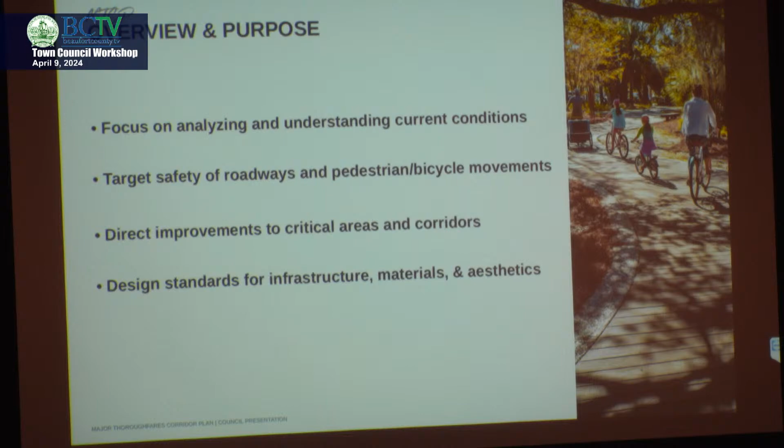I want to jump in real quick, because as I work with Brian and Sean and talk with the community, one takeaway that's probably a little more invisible to town council and the community is establishing a position with our South Carolina Department of Transportation. Our US Highway 278, Pope Avenue, all those streets, well, we know they're not ours. We have opinions on speed, crosswalks, signals, landscaping, treatment. Every time we look at a new segment, example, the landscape cleanup around Sea Pines Circle or the crosswalk at Palmetto Bay Road and Arrow at that intersection, all of that is through an encroachment permit to the Department of Transportation, and most times they ask us, what's the town's position? So what we're trying to do is not bring them one piece at a time, but for the entire system, the entire network, have a grand plan, a grand scheme, so we can implement it over time.

And I think that is the big purpose of the larger document from my vantage point as well.

If I can add, one other critical piece is having a plan in place so we can seek funding from other agencies and partners. Without the plan, it's difficult to convey what we're trying to accomplish. Having this in place with some consistency, the expectations are there. When we request grant funding, there's confidence to know what we're asking for and what we'll be getting with that money.

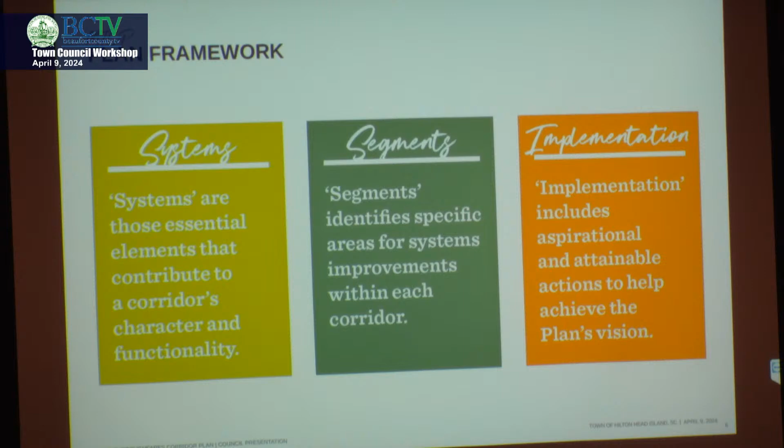I've got my two very capable colleagues with me as well to touch upon some of the technical aspects. The systems, again, we spoke to you before about those. It's about creating safe and robust trail and pathway systems. We've been known through the years as having a world-class trail system in this town. There's still some missing pieces to that, interconnectedness and consistency and width. Again, we've got to prioritize the safety of pedestrians and cyclists. Automobile operators have the luxury of having a vehicle about them, but those other groups do not.

Speed, looking at the speed issues and how that affects the geometry of intersections and turning motions. We've got some high-speed areas in this town, as you know. And bringing a sense of Hilton Head specific character to these corridors. That isn't a monoculture that every street needs to look identical, but this is a very unique place and it needs to have a unique signature from the signage and landscape standpoint.

And I'm always amazed at how much traction, no pun intended, that we've gotten out of our transit system on this island in this town.

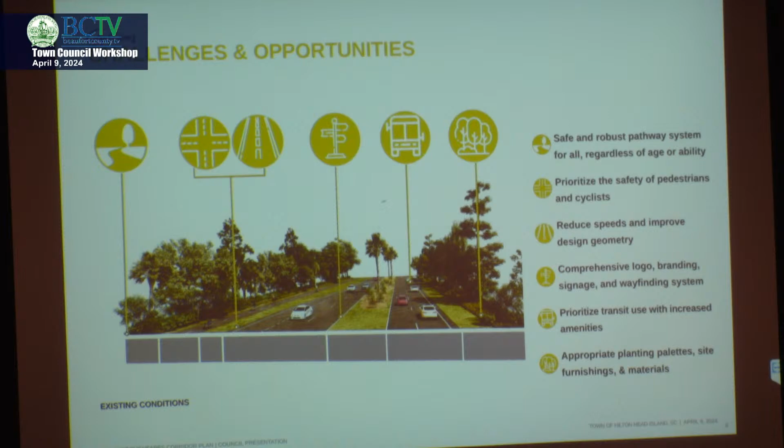So on the landscape and aesthetic side of things, standardizing these materials, dealing with our medians, more robust plantings to provide that separation, providing island-appropriate lighting at key places, intersections and crosswalks for pure public safety purposes, and increasing that separation between automobile and pedestrian bicyclists to the extent possible.

And think about the maintenance and sustainability of this—certainly the engineering aspects of sustaining sight lines, but also the maintenance and operations of these systems. Let's not create more work for ourselves. Let's deal with Mother Nature.

Signage and wayfinding—we've got great public art displays in this town. I think we've got more opportunities to do that over time, and I think that speaks to the brand of the town, and also consistency in improvements and additions of signage and wayfinding on the trails.

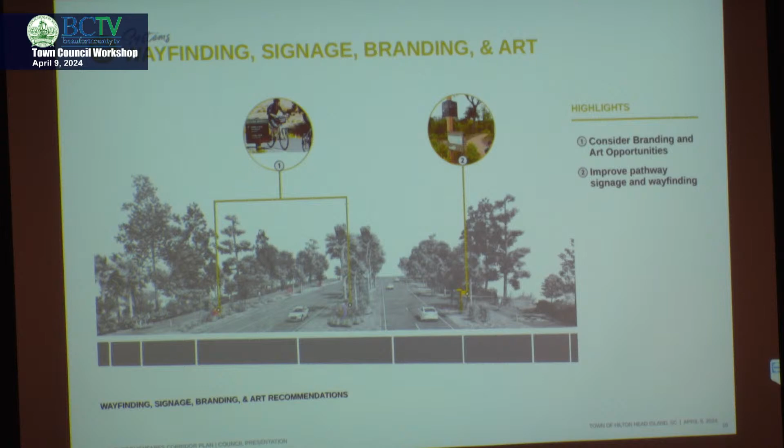Roadways, my friend. Absolutely. So as we've been talking, some of the things that are important for us to think about is creating a uniform design language, especially for our roads.

Your visitors, as well as local residents—you've got a unique driver population here. You've got folks who've been here for many, many years and folks who are just coming for the first time. Consistency in design language is going to be important as we look to enhance safety for the overall corridors.

Your biggest public spaces that you have are your public roadways. And so creating a safe environment is going to be important for us.

And so the first key thing, as mentioned earlier, is that you don't own all of these roads. You have to do things through an encroachment process. SCDOT is important for that.

So far, they've been very receptive to what we're going to present today. But setting important information such as your landscaping, your speeds, your widths—all of those things are going to be important. And then again, incorporating signage and pavement markings as well.

Access management is one of the easiest ways to improve the safety and overall functionality of a corridor. Not every parcel needs five driveways.

We got into a place years and years ago where we just would open up any piece of property for a driveway. We found that interconnectivity and focusing those access points in key locations are making our roads much safer, and how we control those access points as well.

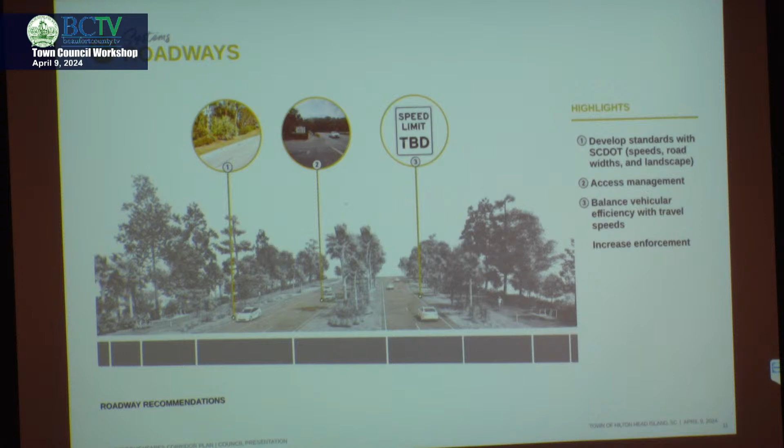A couple other things that are important as we talk about that standardized language is our intersection geometry. Just the segment we're going to talk about today has got some very interesting geometry out there.

It's important for us to make sure that drivers understand what they need to do. And so when we have variations in that, that's when we create risk. We also create concern, and we create accidents because of that.

Improving queuing areas, both along the pathways as well as intersections, is important. I can't stress this enough.

We'll talk about this a little bit more, but improving our crossing standards—how we cross the street, where we intermingle with vehicular and pedestrian and bicycle traffic. You've got a wonderful trail system, but you do have to cross over roadways. So making sure those roadway users understand what's occurring there from both perspectives is going to be important.

And then prioritization of our bicycle and pedestrian safety at intersections. Number one key point right there.

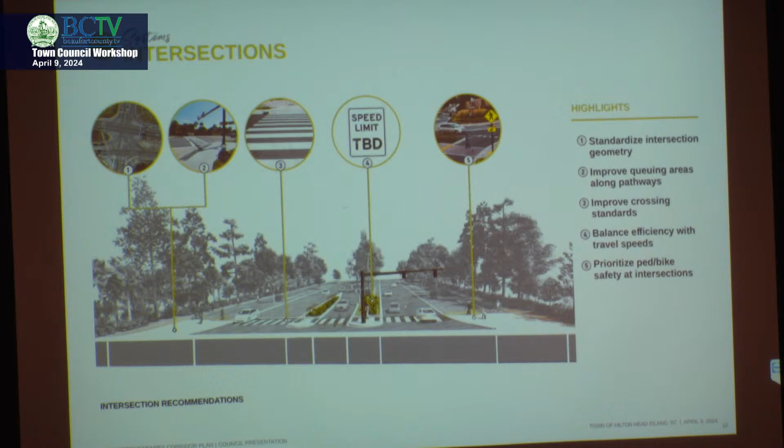I think one key theme throughout this presentation is legibility and consistency, to help set expectations for the vehicle driver, bus operator, bicyclist, and pedestrian. As a mom of two young kids, I understand how we want to move through our systems, and our roads are really set up for moving cars. But with our pathways we want to think not just about safety, which Jonathan spoke about as a statistical number, but about the comfort you feel moving through the system, making sure you feel comfortable with your kids or whoever you're with.

Some things we want to think about are filling those gaps, making sure small gaps are closed, because that has a big impact on overall mobility. Also increasing the amenities, which goes to legibility and consistency, setting expectations on where you'll find certain things, the materiality of those systems, the wayfinding, and the consistency of design for our pathways. That goes a long way for transit too. I like to think of transit as part of the public realm.

Pathways. Bicycle and pedestrians. I think it's just continuing what you're doing and making sure they are the priorities. I think you're doing a great job. All that we need to pay attention to, in general.

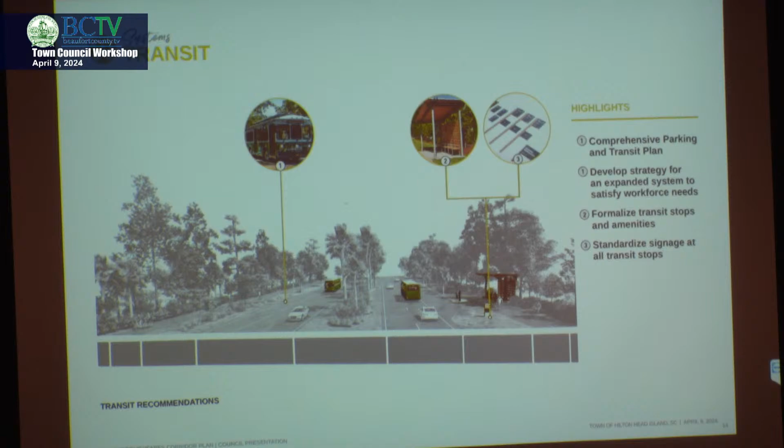Back to transit, it's again about the public realm, making sure it's legible and integrated into it. We need to think about our community and who the users of the public realm are — it's not just cars, but about 30 to 40% of our community are people who can't drive or who rely on bicycles, walking, and transit, and about how transit can be integrated into our system. I haven't looked at it recently, but that's in general.

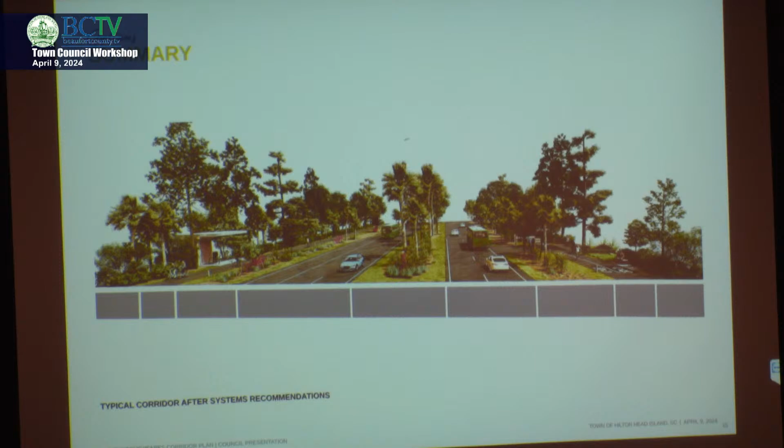With all those incremental systems, this graphic shows a typical corridor understanding of what we're going to talk about next with the segments — and you'll find there's nothing typical about our segments, since every reach of these roadway systems is different. In the graphic you can see all those elements brought together: transit shelters, comfort stations, separation to trails and more robust trails, median planting, transit, appropriate landscaping, and some art opportunities. It's with this summary of elements that we've looked into each segment, as Brian identified early on.

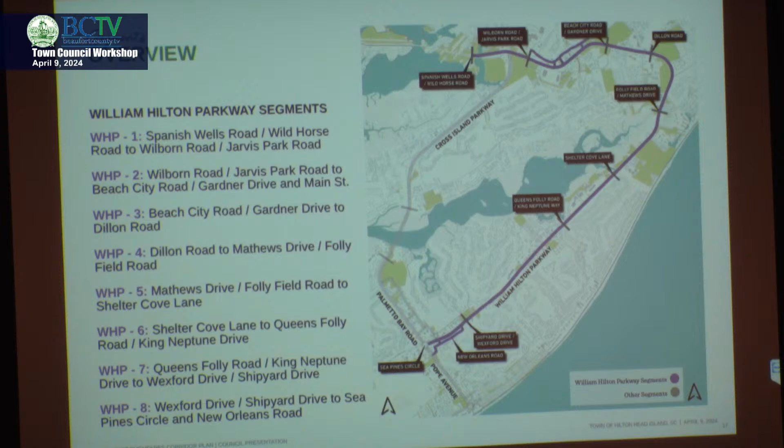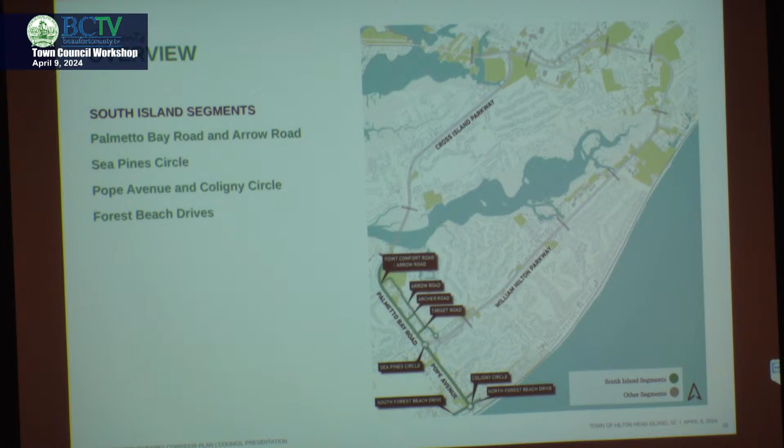The parkway itself is broken down into 8 reaches or segments, based on the character of the place — not necessarily its speed limit, but how it feels and the land uses adjacent to it. Some are bigger than others in length. The South Island segments, as we spoke of before, are Palmetto Bay, Sea Pines Circle, Pope Avenue, Arrow Road, and the connective tissue between Arrow and Palmetto Bay. Also North and South Forest Beach segments, where we specifically address pedestrian crossings to beach access. And the Cross Island, which we've broken into two segments: the bridge itself, where there's a fair amount of folks on bicycles and on foot doing a morning constitutional up and down, and the segment of the parkway on terra firma.

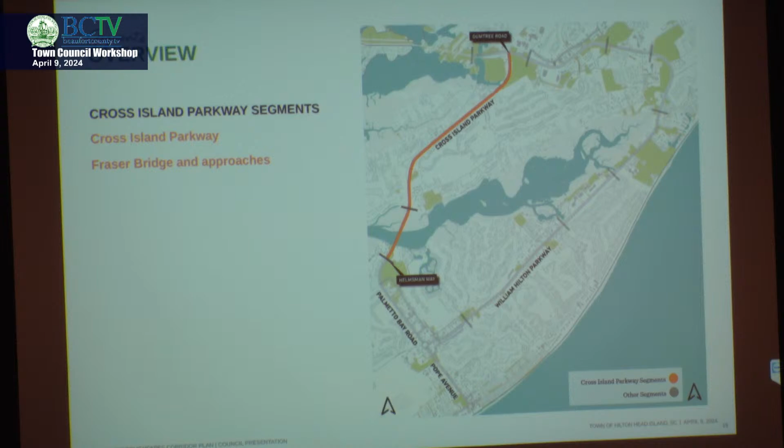So, continue to lead with safety — we've got to look at these high crash areas and minimize them through good design and good enforcement. Connectivity: there are still missing teeth in our systems, and not every neighborhood currently has pedestrian and bicycle connection to destinations and to others. As Addie suggested, we need to fill in those gaps and create something unique to Hilton Head Island. There are certain signature streets and corridors, two of which we'll talk about next, and others as well, but we want to make sure we approach these aesthetically and reinforce the character of the place.

So one of those segments is William Hilton Parkway. Again, this was a priority as directed by you all, just based on the crash data and some of the unfortunate incidents that have happened there.

This is preliminary engineering. What we've dealt with heretofore in terms of systems and segments is at a study level. Preliminary engineering is taking it to the next level of magnification, getting down to finer grained detail, not tens of feet, but feet and inches. It is the link between final engineering design, construction documentation, and getting things built in the ground. This is a necessary step to link the vision to physical construction.

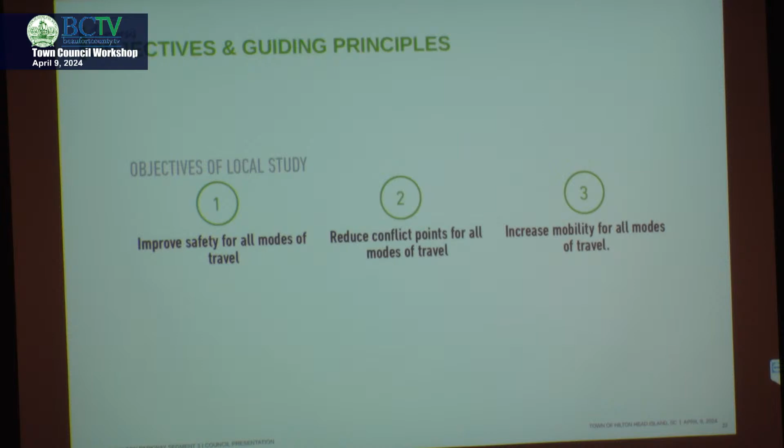This segment is largely a portion of the Mid-Island District, and through the district plan that was adopted by council a year and a half ago, two years ago, we brought those principles forward. This segment of the parkway is meant to be a signature street. It is the center of the island. It's got three significant high development areas and Mid-Island tract, soon to be a park. It's our busiest segment of town, one could argue, from a vehicle operation standpoint. It also has the highest incident of traffic accidents.

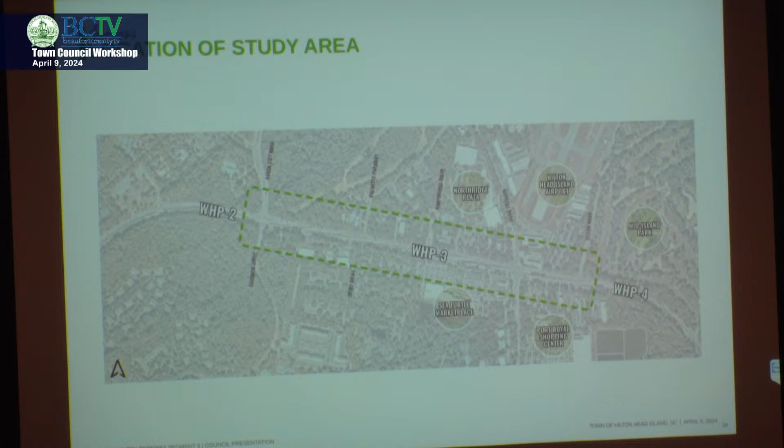So it is a segment that does not go around the horn that is in segment 4. That is the piece from Dillon, moving to the left, which is to the west. A lot of intersections. We've got willy-nilly pedestrian crossings. We've got some marked crosswalks, but all of that needs to be addressed through these intersection plans.

Is this an area that involves a lot of collisions and injuries? Yes, we've had some. Not the most, though, is it? I think it is. Hard to know.

And a lot of rear end collisions, people making turns. I've experienced someone crossing the parkway outside of a crosswalk. There is no crosswalk there. And had I not been paying attention, there might have been another accident.

So it is critical. Some of the history of the corridor, just so everybody understands, today is a lot different than 1965, right? So we shouldn't beat ourselves up. These are issues that every municipality faces, and you all are keen on addressing them holistically.

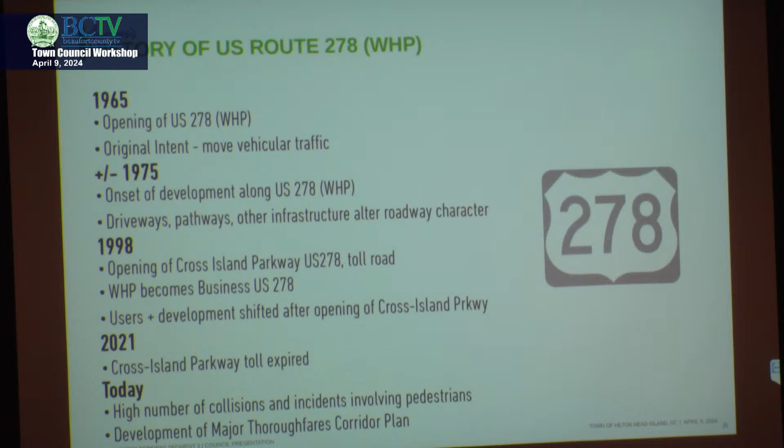To build on what Brian was saying, I think one of the important questions we need to ask is what is the role of this street, and also the history of the street. This street, when it was built, was designed to move cars through Hilton Head. Throughput was the key. As the island's developed, we have land uses that have come online, and now it's about throughput and access, and that is causing a lot of our conflict points throughout the corridor. So it's really to understand that history of how we are in this position today.

And to your point, there have been a lot of pedestrian crashes, 15 fatalities and 53 major injury crashes within the last 5 years. So it's a significant issue. Segment 3 definitely highlights that issue of that conflict between throughput and access to our land uses and why we need to get it right.

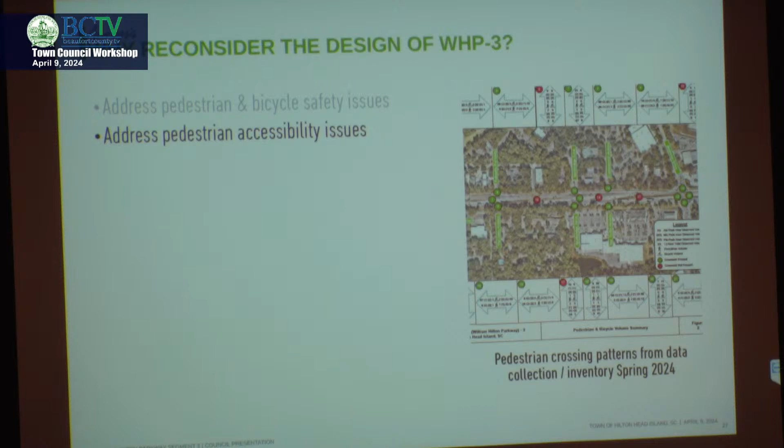Sorry, I didn't want to interrupt you twice, but I noticed that there were traffic counters out there maybe a couple weeks ago. So do we have data from the traffic count through there as a result of that? We do. That information was used to help us understand the speeds through the corridor as well as continued volume, and then classification of vehicle types that are going through there. How many pedestrians, or how many personal vehicles, and then of course heavy units, buses, trucks, all of that information.

So you could do all that from those couple of cords that ran across in two places? I understood speed, so I guess the speed limit is 45. Did you find an average speed through there? We base it off of 85th percentile speeds, which is the point at which 85% of the population is traveling through there. That's kind of a measure that the FHWA has prescribed to us to follow.

What we found was that there were speeds in excess of 65 miles per hour through there. But the consistent speed through there was closer to the 50 mile per hour range. And so what that tells us, though, is that you've got a posting of a speed limit, but you've got a road where most people feel comfortable driving much faster, a lot faster, and that's a problem.

And so we got to find a way to change the design language that makes that speed appropriate through there for all users, not just motor vehicles. So the comfort level for vehicles is lower.

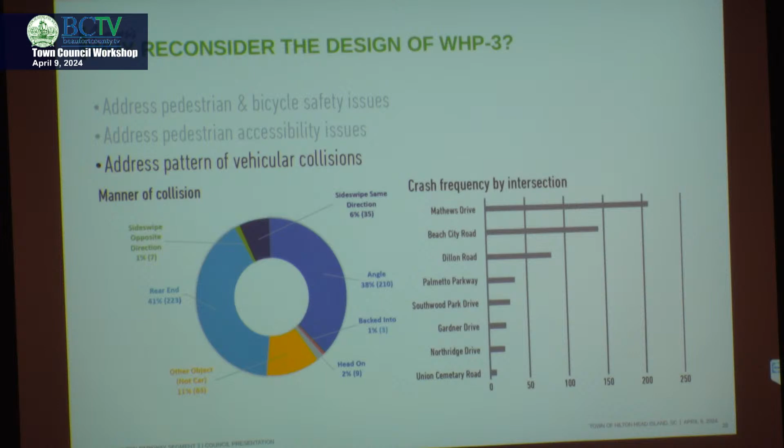Again, providing the safety and the comfort for all modes, I think is going to be really important. Having watched and walked that corridor and watching all the movement of all the modes out there, so increasing mobility, but the safety and comfort and access for all users.

And as I spoke a little bit about that access of William Hilton Parkway really transitioning from a throughput, a street that just moves people, really about access to the land use. How do we begin to balance the land uses and the transportation so that it works in concert and we're not having a lot of these crashes happening along the corridor?

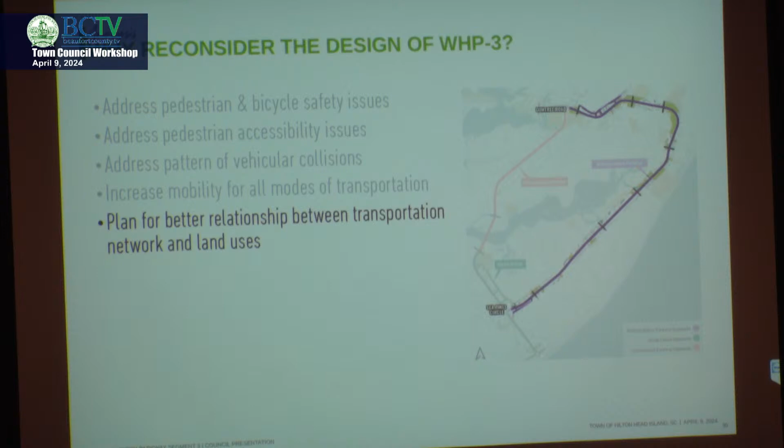So staff and our consultants understand the importance of this section and addressing it as quickly as possible. We did a permit application to SCDOT to improve things on a short-term basis in November. We got feedback from SCDOT about additional information that they needed to approve those requests in December. We talked to Jonathan Guy and Kimley-Horn about creating that information that was needed.

Yesterday, they delivered this packet of paper to us that we can submit to SCDOT. And Jonathan talked about some of that and answered some of the questions earlier in the meeting. We will be setting up a meeting with Josh Johnson from SCDOT to talk about these recommendations that Kimley-Horn came up with to justify our request in November. That meeting will hopefully take place next week.

Those requests included some pathway lighting, puck lighting in the pavement for the non-signalized intersections, RRFB - rapid flashing beacons - and push buttons so that when there's a pedestrian that wants to cross these mid-block crossings, they can push the button. The rapid flashing beacons go on, and the pavement puck lighting comes up so that people understand that there's somebody needing to cross there.

We're going to improve the pedestrian crossing markings out there. We talked about a reduction in speed limit - the reduction recommendation is 35 miles an hour. And then do some kiosk improvements in that area.

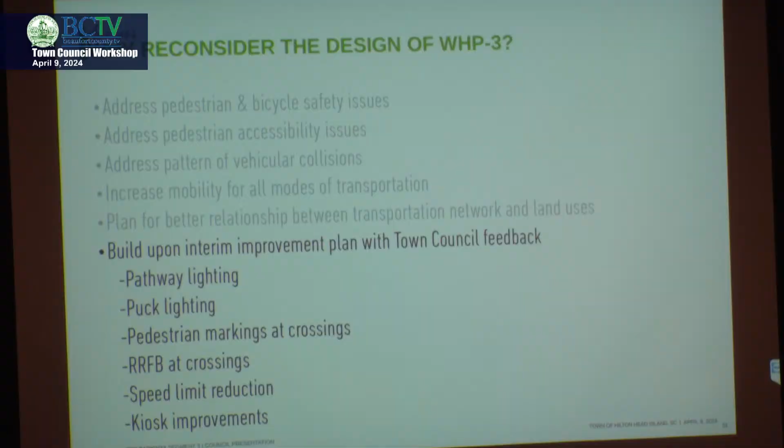In connection with those suggestions and recommendations, one concern is that pedestrians and cyclists were not crossing at crosswalks. They were doing it in the middle of the block. It sounds like these will be safety inducements, that if riders and pedestrians know about them, they'll go to the intersections.

But there may also continue to be people who don't go to intersections. One thing I forgot to mention is that we plan some median plantings, low-level plantings to encourage people not to have to go through the jungle to get to the other side. If those safety improvements are in place, more people will use them, helping them decide: do I really want to go through all that, or just walk an extra couple hundred feet?

No, go ahead. Jimmy, one of your points here is speed limit reduction. You can take signs that say 45 miles an hour and move them down to 40 or 35, but I don't believe that's going to slow people down. What are the techniques or tools in this design that will encourage a lower speed?

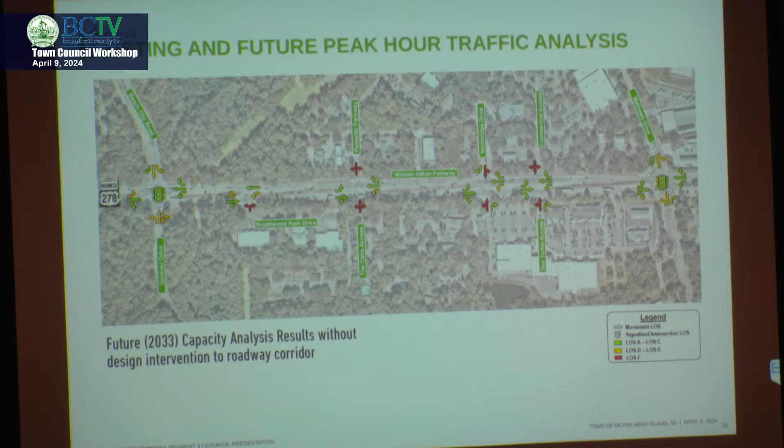Let's talk about some of the tools and mechanisms we've got for the future year. As Mr. Orlando said, we've already had some initial conversations on all that you're going to see here today, especially on William Hilton Parkway, and have received the nod that this works within our right-of-way from SCDOT. That doesn't give you the right to go build this today, but what it tells us is we've got a really good plan to move this forward.

Our first goal is to change that design language of speed. For so many years, this corridor has just been a thoroughfare just to get around to the beaches. We need to change that. The population has changed, there's more people here. How people move in this area is important, not only just from a motor vehicle standpoint.

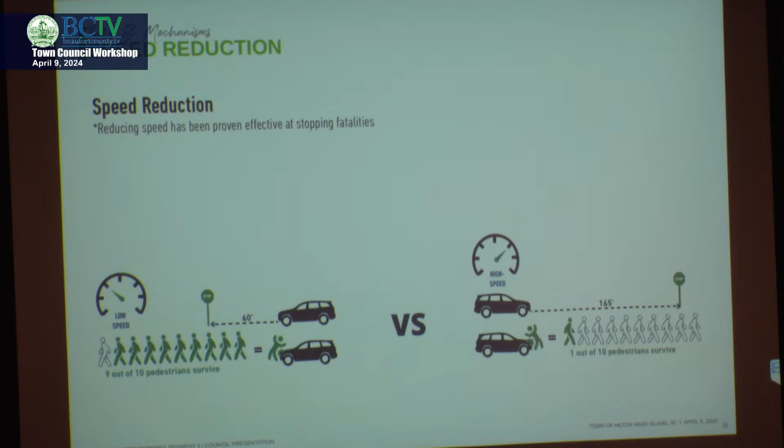You can see that what happens when we increase that speed, that overall stopping sight distance we need increases by a tremendous amount. Just that change right there is over 100 feet. And you also see the survivability when that does happen, so we're stressing the point of that as we get into this.

Another way to do this, as I mentioned earlier, is changing how we look at the geometry. The first one is our lane widths. I had 12 foot out here for a very long time, and when you have that plus a median plus open shoulders, it feels like you got 14, 15 feet. It feels like I've got a runway and I can go really fast.

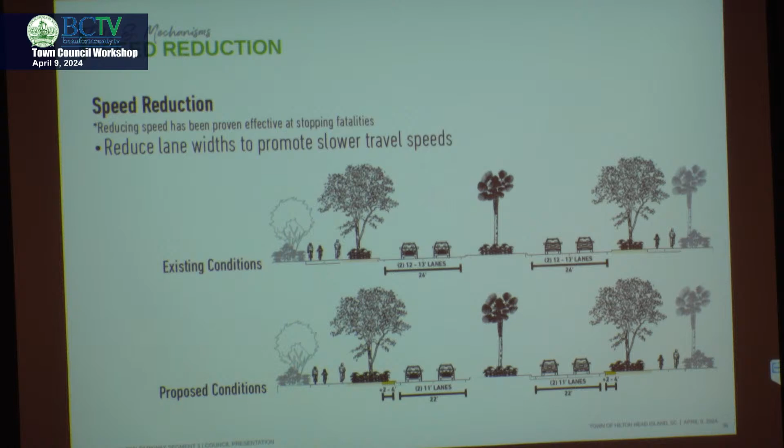Because this is still a U.S. numbered route, SCDOT will not let us go below 11 feet. That is their policy, so we need to work with them to get that down. There are other things we will do that will change that language though, but 11 feet is our recommendation.

I've mentioned the speed reduction through here and what we would like to do at 35 miles per hour. This does not mean we're going to do a uniform posted speed throughout all of William Hilton Parkway though. We're going to look at it contextually. And here we need to change that speed limit from 45 miles per hour down.

Reduce the signal cycle duration. Sometimes we do need to look at how we do that. Your adaptive signal system is already working through that right now, it's providing that change of signal systems. We want to incorporate crossing patterns that work, so adjusting those signal timings to help bring more crossings for bicycles and pedestrians is going to be important.

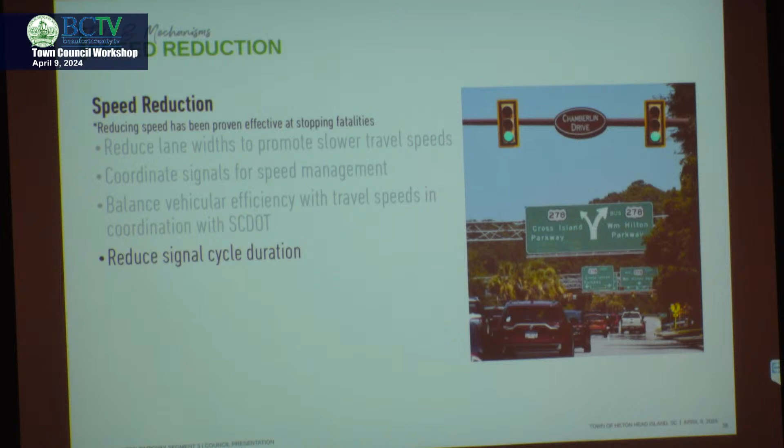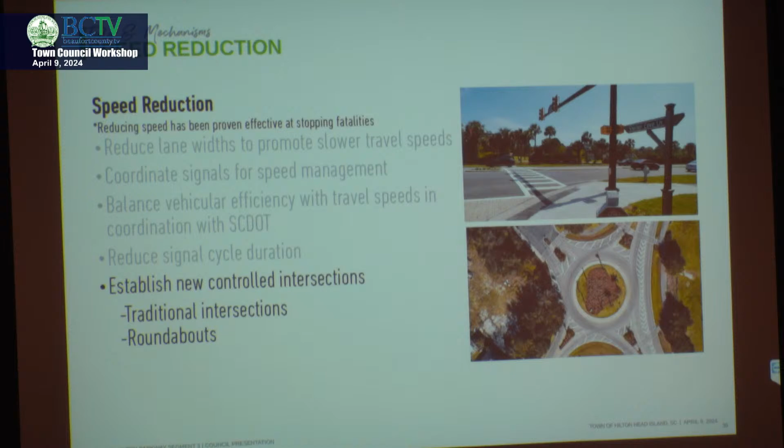We also have to look at different types of controlled intersections. This is essentially how are we going to assign the right-of-way? If we keep it on William Hilton Parkway and never let the side streets go, we're going to have more congestion, people get frustrated, and they're going to begin to cut through neighborhoods and other things. So looking at traditional intersections, signalization, and some four-way stops and potentially some roundabouts too, when and where we need to do that.

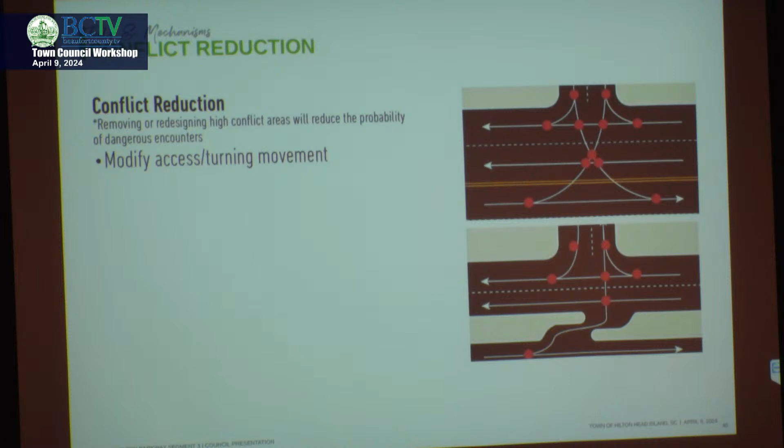The number one thing we need to look at, it goes back to all of these other things, is conflicts, where we have those intersection points between vehicles. Up here, just when you have a full movement versus a controlled movement, you reduce the number of conflict points, those interactions between vehicles, just by changing how a median interacts. So that's what we want to look at: focus the turning movements where they need to be, not necessarily restricting them, but focusing them where they need to be. That's going to make a big difference on how we move people here.

Then, of course, providing protected pedestrian crossings. RRFBs, rectangular rapid flashing beacons, are one of the first things that we do. Moving from there, we can go into a hawk signal, which you've got some on South Forest, which controls traffic there, but also looking at signalized intersections. DOT will tell you, and I've seen this in the number of studies that I've done and the intersections I've designed this way, better compliance comes with signalized intersections than hawk signal.

Drivers do not understand what a HAWK signal is. They don't know: do I stop? Do I go? What do I do? Do I have to pay attention to this?

So SCDOT will allow these, but they prefer to do a regular traffic signal. We'll work with them on where that fits into the overall program.

Sorry, a quick question there. For lack of a better term, I call it an all-stop. That is, instead of allowing pedestrian and bicyclist crossing with turning traffic, there's no turning traffic as well. Is that included in these designs?

Absolutely. Some of the things we can intertwine into the signal system are what we call LPIs, leading pedestrian intervals, which is essentially an all-stop. That pauses the network just a little bit so we get pedestrians out ahead of those turning vehicles and the side street or main street movements. It's easy to incorporate into the system without a lot of infrastructure upgrades.

Hopefully a longer interval for those of us who move more slowly, or where there are so many lanes that you have to run across. Okay, thank you.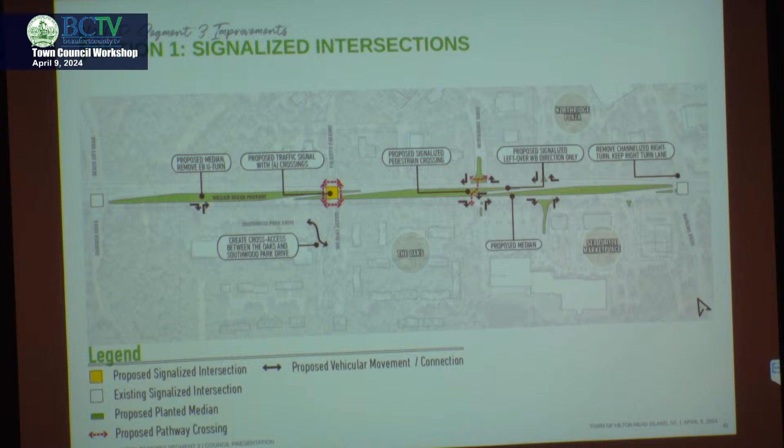Focus on just two intersections. I've already discussed these, but you can see the improvements here in how we would lay this out. You can see the channelized movements providing generous crossing locations and generous crossing widths for the crosswalks, uniform stamping of those crosswalks, which has already begun coordination with SCDOT, and that directional signalized crossing down at Sea Turtle Marketplace with that left coming in. All of these things begin to enhance the safety.

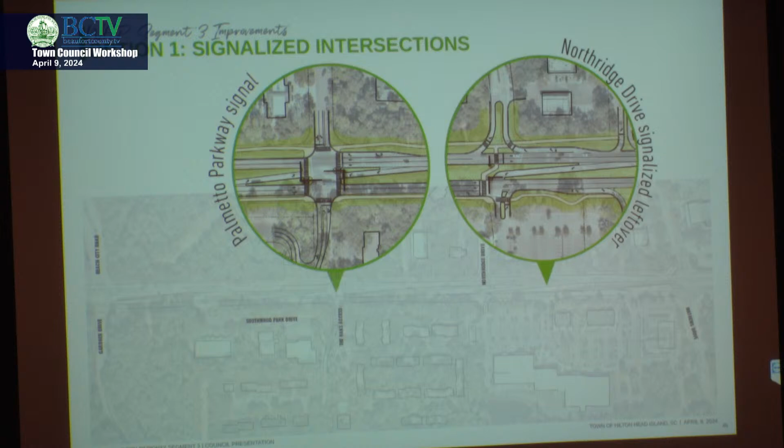Tom, are you adding pavement or taking the pavement out to these? Great question, we're actually taking pavement out. One point I failed to mention is that because of the way you're setting these medians up, you're actually enhancing your stormwater by removing impervious surface. So there's a double-edged benefit from this - not only pedestrian and bicycle and mobility safety, but also an environmental impact in a positive direction.

Second question, how many cars travel through this area on a daily basis? You're in the upward of 30,000 vehicles per day. I can get you a precise number, but that's roughly what it is.

Another option here we mentioned - I failed to mention this at the beginning, you'll see these options laid out, option 1 and option 2. Option 1 is the one we feel strongly about, and option 2 are some of the things we've considered. I mentioned earlier that we did consider some roundabouts through these locations. To be honest, the reason that was considered is for one of our primary reasons - speed reduction. Roundabouts do that, but they also provide incredible mobility and keep traffic moving through there. So we did consider that.

We did present this to SCDOT, they did not have any reservations. We actually looked at a series of roundabouts through here at Palmetto, Northridge, and of course at Sea Turtle, providing that mobility and access as well. Our conclusion was to actually go with something more uniform on the corridor, which is what I just recommended with option one, where we have traffic signals at those locations.

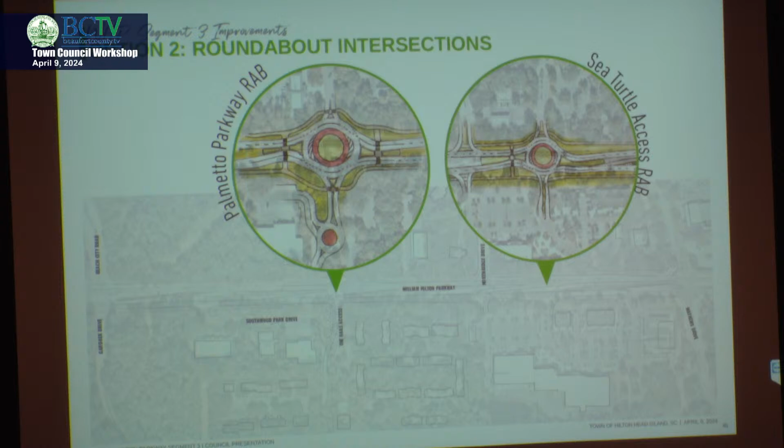So let me jump to the conclusion. With a signalized intersection, it doesn't reduce conflict points to the same level as a roundabout, as already expressed in some commentary today, and it doesn't control speeds as well. But they do have benefits—higher level control for pedestrians, which is a large concern for us, and by channelizing this we take out some unsignalized conflicts. Roundabouts provide a gateway, as mentioned earlier, though there's some fatigue on the island with roundabouts, and close spacing of multiple roundabouts—while that spacing does work, I've modeled it—at times with oversaturated conditions it could back up into some intersections.

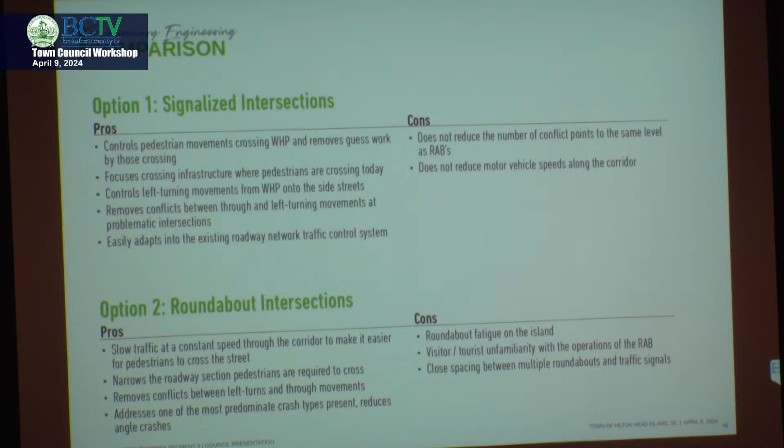Your recommendation is a signalized intersection. Correct, that's where we are at this point, still working through all the final details though. Again, both options do work.

Do the roundabout options require any more right-of-way? A slight bit on the side streets. William Hilton Parkway was designed originally with a very large right-of-way, so you can fit either option in there—it's really just the side streets and how you tie in, so we're talking about really small areas. The main circle fits within your existing right-of-way, which you don't find that often on corridors in South Carolina.

This is great to hear some of your thoughts on roundabouts versus a signalized intersection in a stretch of road where people have been injured and killed, in an area we wouldn't think about a roundabout or signalized intersection. The exercise we have to keep doing is—I don't want to just throw out the roundabouts, but I'm more interested in what's the most efficient and safe enhancement. We haven't dove completely deep into all those details yet, but it sounds like some of you would like us to continue exploring a roundabout option and not go all in toward the signalized intersection. Some feedback is needed, I agree. There may be other places along the corridor that could introduce a traffic circle beneficially, so it becomes a theme—as long as it's not a turbo, I just thought I'd throw that in, Jonathan.

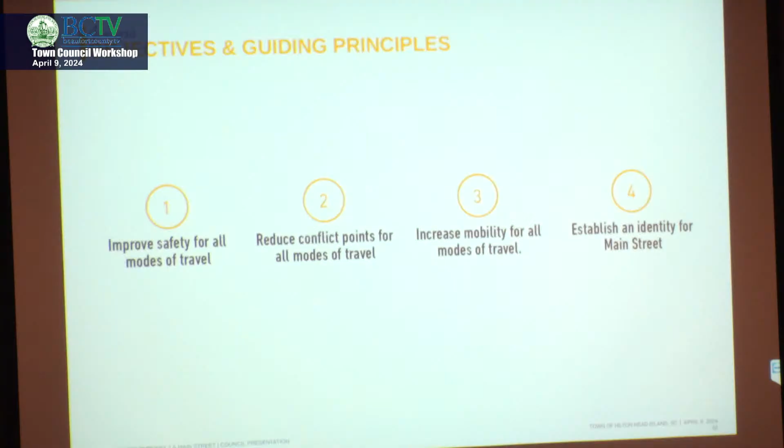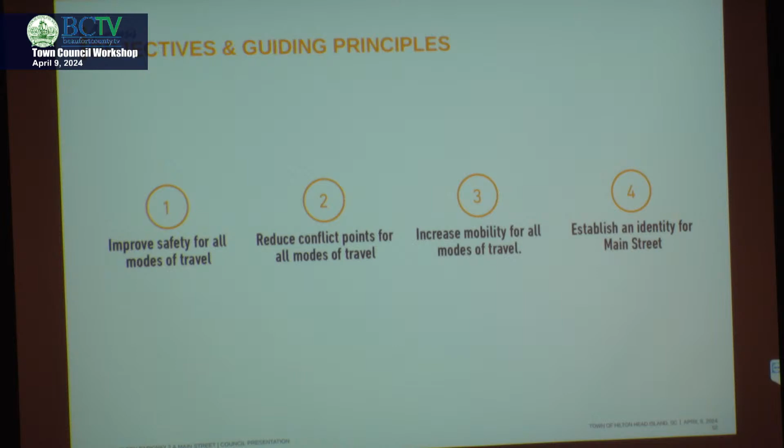Again, not lost on anyone here, it begins with safety—reducing all those conflict points across the various modes of travel. It's safety for everyone, and also continuing to reinforce the identity of Main Street. It's a retail destination, a restaurant and office destination, we think.

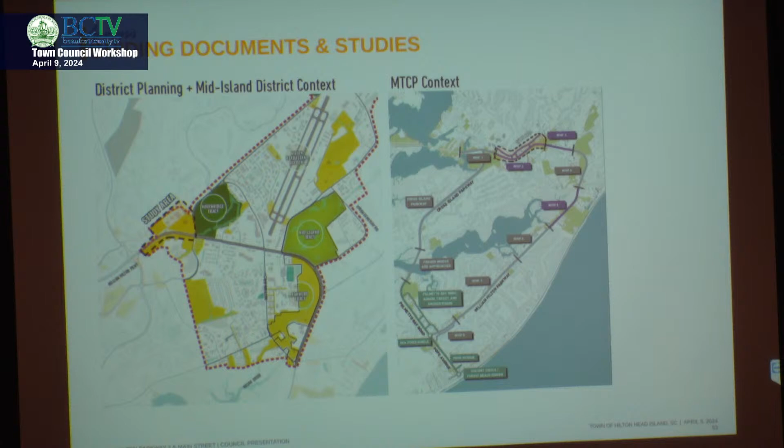So this segment connects on the left image to the segment we just discussed, and it goes all the way west—or north, depending on your orientation on the island—to Wilborn. It's a very key segment, and the town has just recently taken ownership of the other portion of Main Street, and there are needs for it.

So this is the study area, and it isn't just Main Street and Parkway 2, but also the connecting streets between those two. There's a lot of missing teeth from a pedestrian and bicycle standpoint on Main Street, and we want to bring consistency to that and these connecting streets.

Yes, I think bicycle and pedestrian connectivity is going to be key along these streets, particularly with the schools adjacent to it. Also just formalizing where each mode should be within the right of way, and making sure those modes know where turning movements happen along there as well.

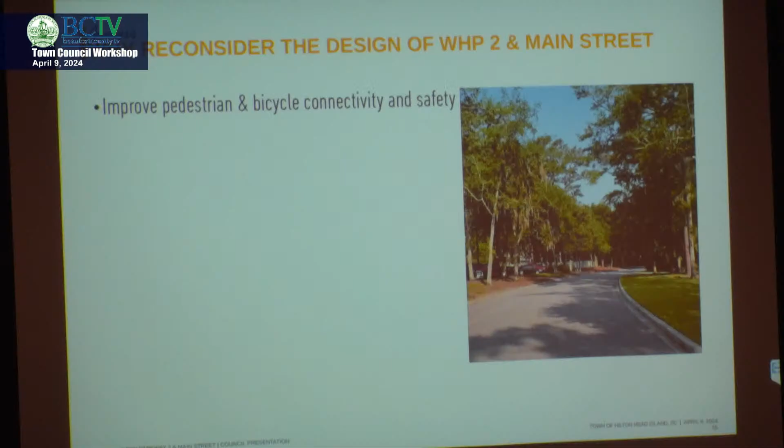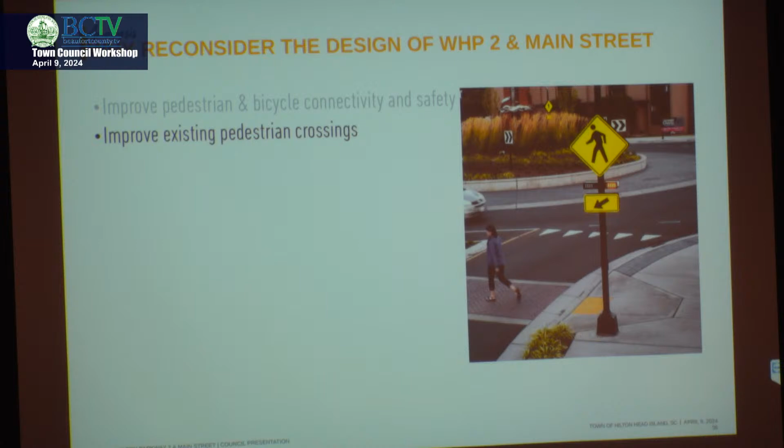As we've talked about, there are different ways we can look at pedestrian crossings—whether it's a raised crossing, an RRFB, a HAWK signal, or a formal signalized intersection. There's a whole host of things we can do on these corridors to really enhance not only safety, as I've spoken about, but also the comfort of all these users.

It's really important along this area, as we have several schools here, thinking about students accessing the schools—not just with bus trips, but also high schoolers accessing jobs. Not every high schooler has a car, so how do they get to jobs within the area? It's really important to think about transit options, access to school, and creating opportunities to move freely and comfortably throughout this space, particularly with all the schools located right here. I think it's going to be critical to move forward.

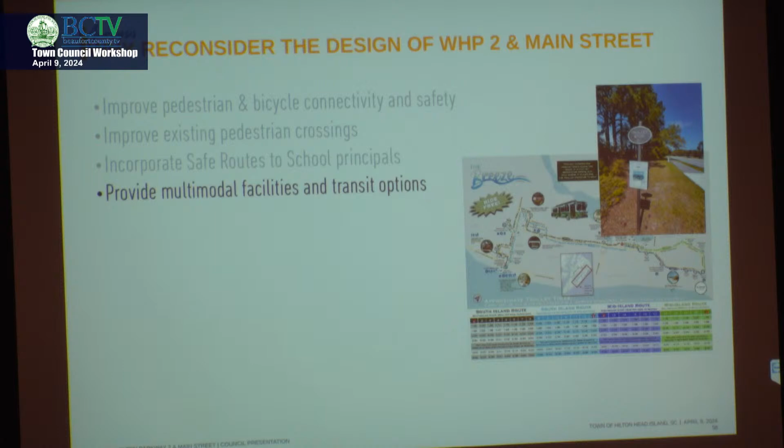In terms of the intersection, we're looking at taking away these right turn lanes and really simplifying that intersection. Again, that helps with the safety aspect of pedestrians and bicycles crossing, and sets expectations for drivers of where they should be, slowing those speeds and making vehicle movement intentional.

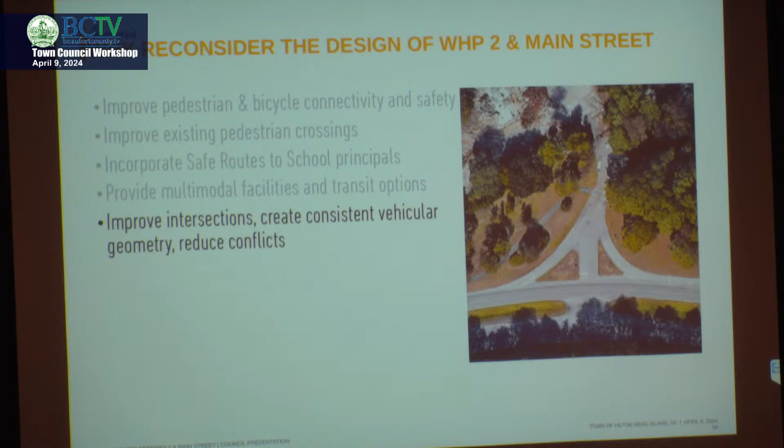Main Street is a great opportunity for us to reinforce what I think is a pretty attractive character now. It's a fairly narrow street with some movement to it, and it's got tree cover for the most part adjacent to it. I think we want to take further advantage of that through the landscape, letting the green environment come into the street to create a more attractive and walkable street environment. As you can see, there are places where we have no walking at all, and we want to brand this as a special place among a few special places on Hilton Head Island.

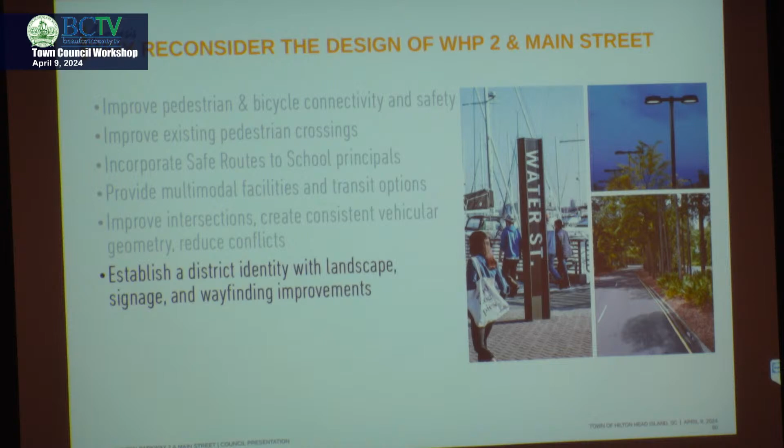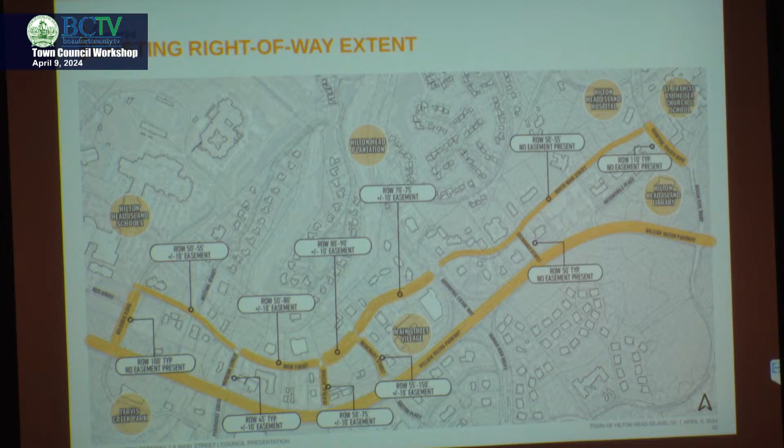That has been the focus of Main Street from Wilborn up to Hospital, and all of these intersections in between. You can see the movement of Main Street as it meanders through. One thing to keep in mind is there's not any consistency to the width of the right-of-way and public domain we have for Main Street and some of these side street connections. We've got the luxury of easements to the west and south of Whooping Crane, which we'll take full advantage of, giving us more room for a section and for pedestrian comfort. It gets more narrow as you go to North Main Street, and side streets vary from time to time, so we've got some segments and sections that differ.

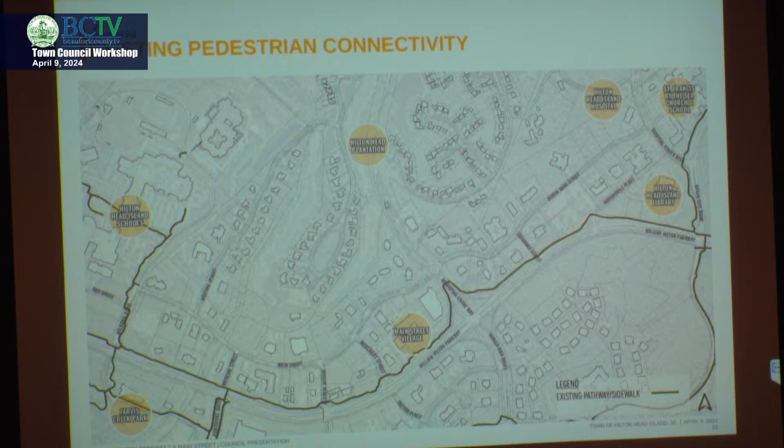As Brian mentioned, we really have a lot of limited sidewalks and pathways throughout the area. We have some pathway on the north side of William Hilton Parkway, but those side streets don't have any bicycle or pedestrian facilities into the adjacent areas. So when we think about the considerations, not only taking into account the right-of-way that is available, but thinking about user comfort along that street, accessing those businesses, crossings were those to happen, thinking of the school-age kid, the high school kid, the parents, and everybody in between, not only accessing the businesses and the workers through there - we're really thinking about how do we apply a design that's both context sensitive to what's happening along there, but also takes into account the right-of-way that we have available, reducing speeds and improving connectivity across Main Street.

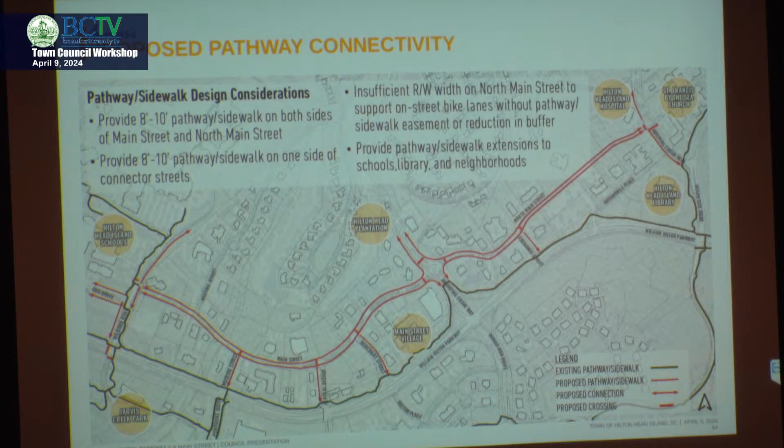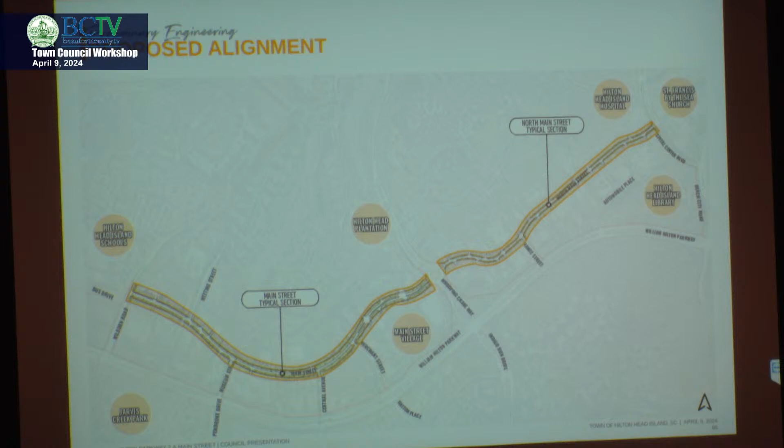Let's dive into some of the preliminary engineering work that has been prepared. As Brian mentioned earlier, we've got inconsistent right-of-way widths and easements throughout both segments here. So we're going to talk about the Main Street section, and we're also going to talk about the North Main section. We're separating those two because there's varying widths and varying desires through there, and we're going to look at a couple different typical sections on this.

We've approached this with areas where we have both an easement present and areas where we don't. In this typical section, what we're proposing are 9-foot travel lanes and then a 7-foot buffered bike lane on both sides - a 2-foot buffer with a 5-foot bike lane, and of course curb and gutter parallel to the tree lawn, and shown on both sides would be a 10-foot pathway providing mobility through there as well. You can see the existing easement through this section of Main Street where we've got 50 feet of right-of-way, which is our minimum, and then the need, where it is and where it's not, of 10 feet on either side to fit what we've got in here.

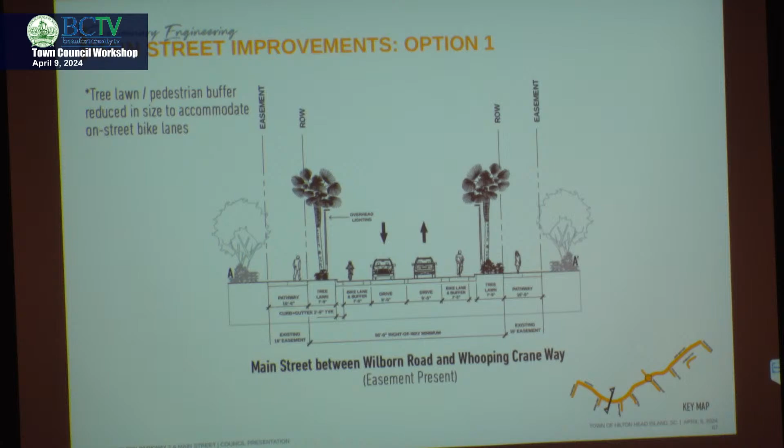So thinking about what that may look like from a perspective standpoint, you can see the bicyclist with the pedestrian buffer. Again, standardized lighting through this, the typical 10-foot pathway on both sides, the travel lanes narrowed down, enhancing our crossings at different locations. Again, standardizing the design language, standardizing your crosswalks and crossing locations so that drivers and pedestrians know what they're encountering.

So option 2 - sorry, can you go back to the nice colorful slide? Some places along this have a landscape median of various width and shape. It looks as though some parts would not have a landscape median and some parts would. From best I can tell, the ones that would are closer to the traffic circle on Whooping Crane. That is correct.

The 9-foot lanes, I guess it was necessary to take out any of that landscape median. I just feel like there's going to be a little pushback from folks who frequent that area to take away the trees. But I recognize that we have to make some trade-offs.

At some point, I guess, we're going to ask the question about stakeholder input from folks that particularly live in there. Four of us here live within the gated community of HHP and come and go from that area a lot, but we should reach out to maybe the POA or residents there, and also the merchants in the Main Street area and businesses on the other side. So at some point, perhaps we could talk about where stakeholder input will come from.

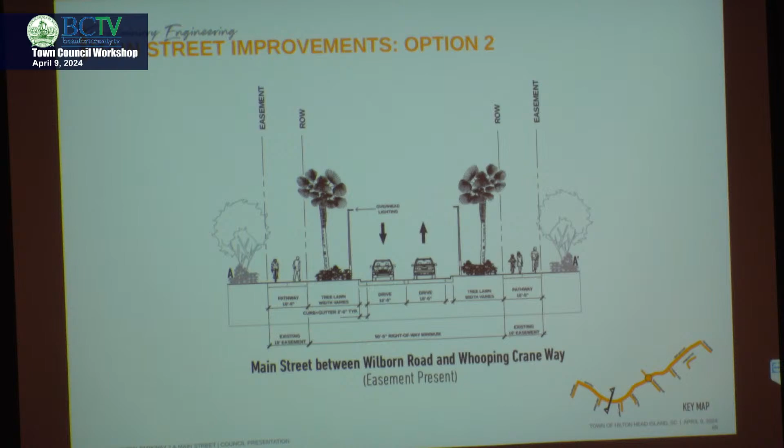This is a representative image of what that may look like. You can see the common typology there that I've described earlier. Overall, kind of where we're at in the overall segment - the main difference is you take out the bike lane on the road and add 1 foot to each drive, and then add width to the tree lawn. It varies in width depending on where we're at, and it gives you a little bit more separation between the trail and the moving lanes of traffic. The street is just for automobiles at this juncture, and bicyclists and pedestrians use the parallel trails.

Right now we've been improving the sidewalk on the side closest to 278, the best way I can describe it, because it varies whether you're going north, south, east, or west. But there's no sidewalk on the other side.

Where the options are prioritized. Correct.

Why would you put this behind the first option we just discussed? What do you like about this one better? We were going to ask you the same thing. Exactly. Well, I like this one, so... you know, both of them work, right?

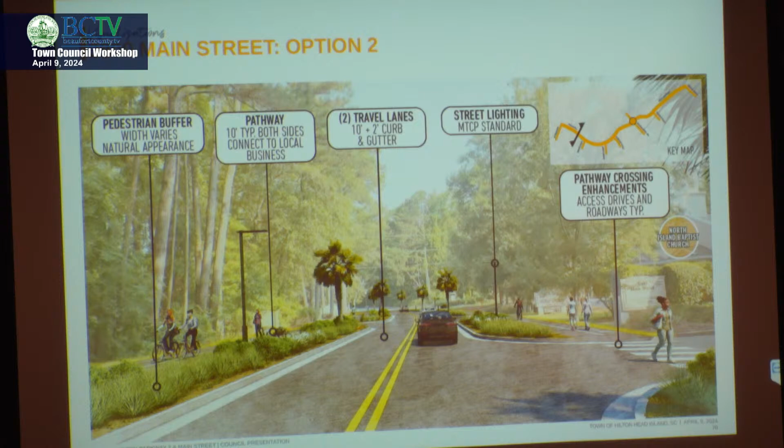With options, there's been some desire for on-street bicycle mobility, separate. And so that kind of was the reason for option one falling into there.

May I add too? Because I asked the same question. I heard all of your comments, and some appreciated pathway off the road like we have on our island versus bike lanes on the road at the last workshop. And I asked the same thing. I asked Sean the other day.

It's not - it's simply a different menu item. But at the end of the day, Main Street, because of the businesses, has a higher potential to be much more walkable than not, right? A lot of our pathways are used by bikes, e-bikes now, and people, and it's less walking and more biking. Main Street, when you're parking and walking to the next shop or to lunch, if you're a traffic engineer and a good one, you're going to tell your municipality as a client to say: separating those folks going fast on a bike from those walking somewhere - separate them. That's what a traffic engineer tells us, and that's the big difference. It's about what our appetite is in terms of how we want that street to function in the future.

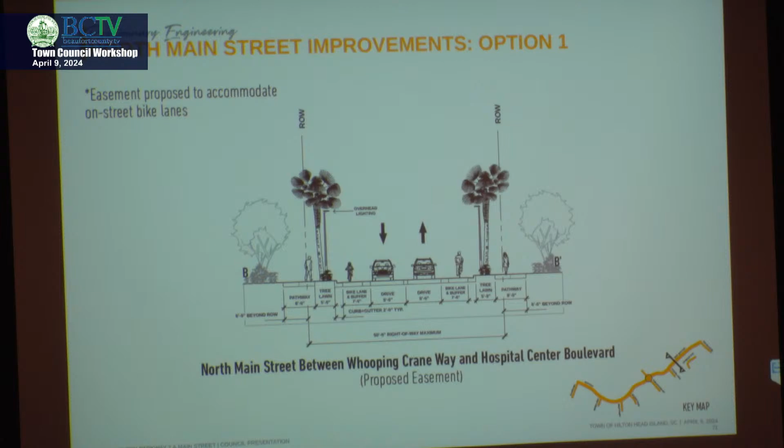That looks like - again, you can see the translation of how that would be. Very similar, but the scale's a little bit tighter through here, so the elements become a little bit tighter from a trail standpoint and from tree lawn. Questions on this segment?

For option one, there's a proposed easement, and I think the other option is to reduce the buffer. It's on 64. That's what my note said.

I don't know, correct. So you'll see that as we look at the different options on how we try to fit this through here, and how we fit this.

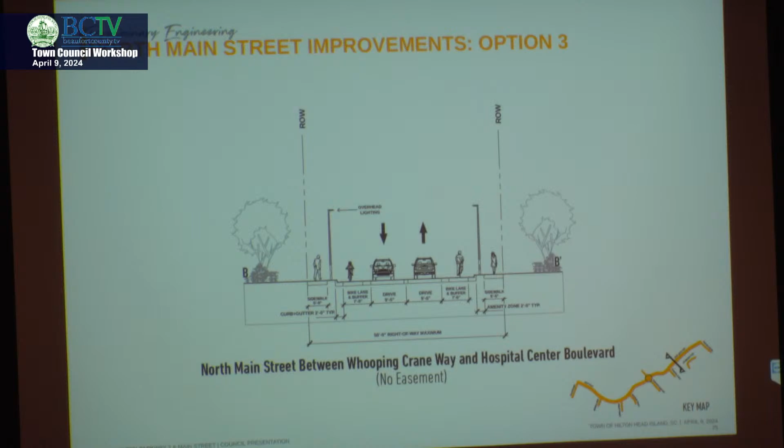This one, just like option 2, fits within the existing right of way. Here's a representative image of what that may look like. You'll see in some places it's tough to get grass to grow in a 2-foot strip, so that effective width is really about 7 feet depending on where you're at when you have some of those utilities—that would be some sort of textured hardscaping through there.

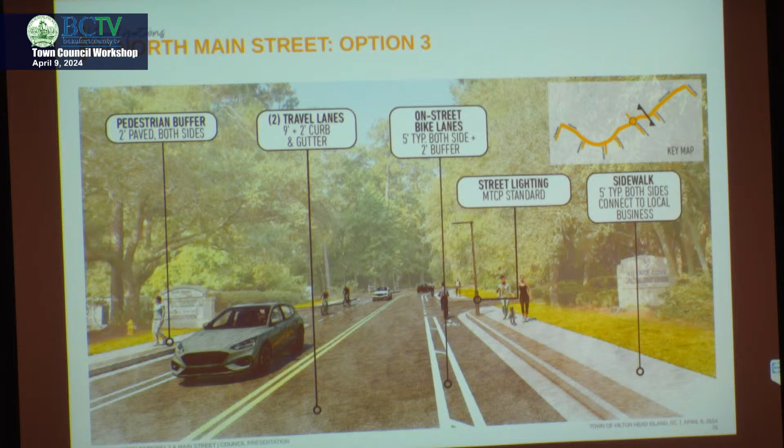Going back to earlier comments about intersections and roads, to train the eye to see things the same way—would it be your opinion that on both sides of the circle these would be the same? Meaning either the bike paths would be on the road or separate, so you're not trying to alternate between the two. Yeah, just wanted to point that out. Great point.

Okay, let's talk a little bit about, if we move past typical sections, some of our corridors themselves—Wilborn Road, excuse me. Yes sir, I'm John, sorry. Couple of general questions on the Whooping Crane, on Main Street.

Every drawing shows lighting standards. Are they pulled by SCDOT or are they local decisions? Well, in this case, on Main Street, this is your street, so you would control what that is.

General comment—I don't think we've developed sort of an attitude towards lighting on Hilton Head, where, how, and so on, and I think that has to be an important part of discussing at this point. And just a personal opinion on the sections, I think it's important for bikers to be able to ride on the road if at all possible. I think the scale of option 3 feels more like Main Street than option 1, where we're going overboard with easements and so on. Personal opinion.

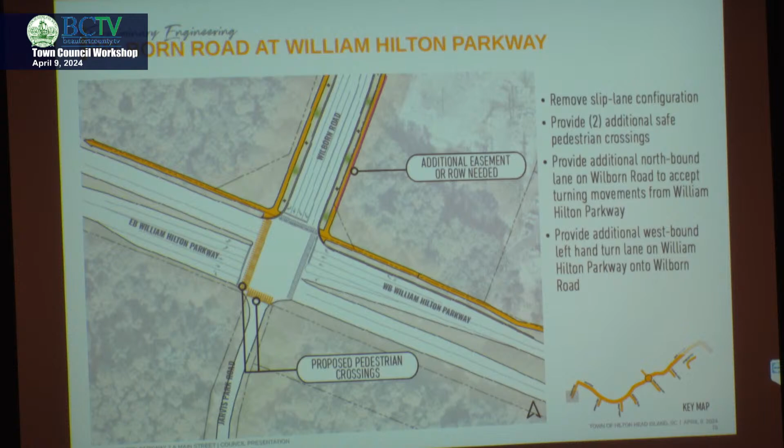It does require a little bit of easement on one side to accommodate that. That really comes down to how it has to align with the opposite side—how to make those alignments work out correctly.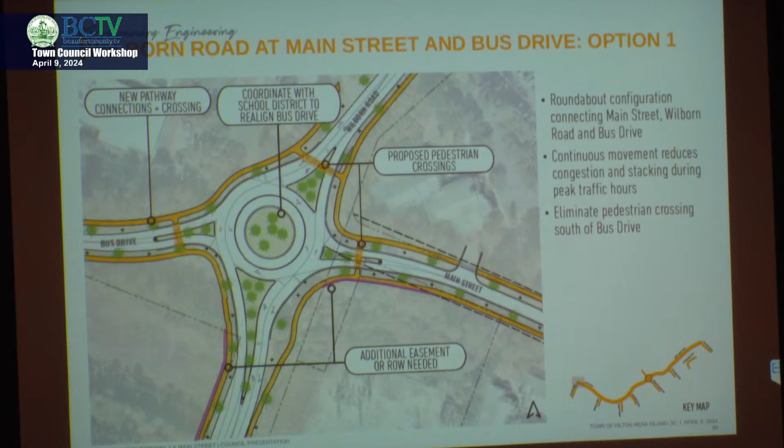On intersections—yes ma'am, you're talking about that. I'll have to go back and walk over there to see the misalignment you're mentioning. Is it possible to change that without additional right-of-way on an interim basis? You'd have to rebuild the street on the other side to make that work. That's really the alignment—it's the throughput, and I've got a little bit of play crossing an intersection.

What I'm showing here is a perfect zero offset, so I've got about 6 feet, half a lane width, to play with. We might be able to narrow it down to maybe just a foot of easement through there, on the substation side, so I'm hoping we can get a willing partner to help with that easement—it's not ever going to be built on. I was just wondering, on an interim basis, if we couldn't straighten it out a little bit until then.

Good question. Have you been out there in the morning and afternoon when the parents are dropping off and picking up kids? Absolutely—we're going to be able to accommodate that better than the way it is now. It's congested. This was one of the things we talked about with Jim initially, wanting to enhance this.

It desperately needs it. I have a question regarding the traffic circles: as a car peels off in the right lane to take a right-hand turn and there's a pedestrian crosswalk, does it make sense to add something in the pavement in anticipation of that crosswalk, so the right-hand turning movement is made aware of it?

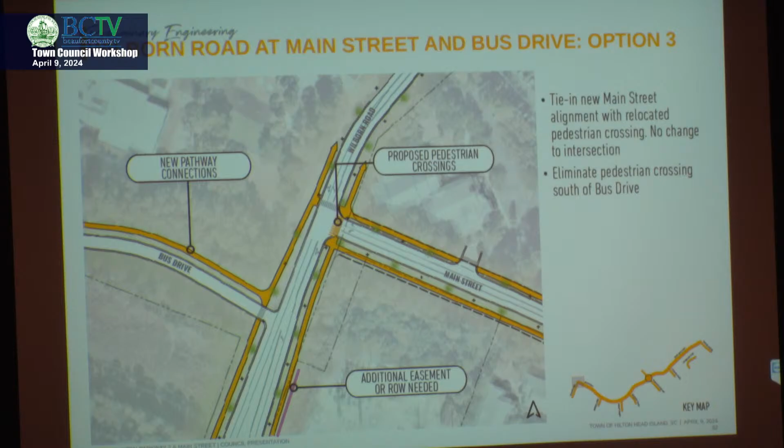John, I don't know if we're trying to get feedback or comments, but the circle is civilized and hospitable. Traffic lights are injurious, I mean they are brutal. So I think we're a hospitable island, we ought to be having circles - reasons why it's number one here. Except for the old circle where people used to get stuck on the inside. It never got out, right, still there.

So of those three options, it seemed like option 3 ought to be off the board pretty quickly. Yeah, I'd agree with that. So between 1 and 2, which is safer for pedestrian crossing and bicyclist crossing?

Common theme for me, obviously. No, I think it's a great question. In this situation, contextually, this is a location where you anticipate a lot of pedestrian traffic, so the roundabout would work quite well here. You're coming into a school system, you're trying to set that. That's not necessarily the same on William Hilton Parkway - this is different, the scale is much smaller too. So you're able to scan the intersection in a broader perspective and see a lot of traffic and pedestrian movement quicker. Plus, unlike William Hilton Parkway, we can actually raise pedestrian crossings here.

Not something SCDOT allows us. Is it our street or the county's street? This street is our street - well, which street? Yeah, it's Wilborn. It's complicated - Wilborn is SCDOT up until you get into the school, close to before that, or after Bus Drive. It turns after as you get up towards the schools, but Bus Drive is the county.

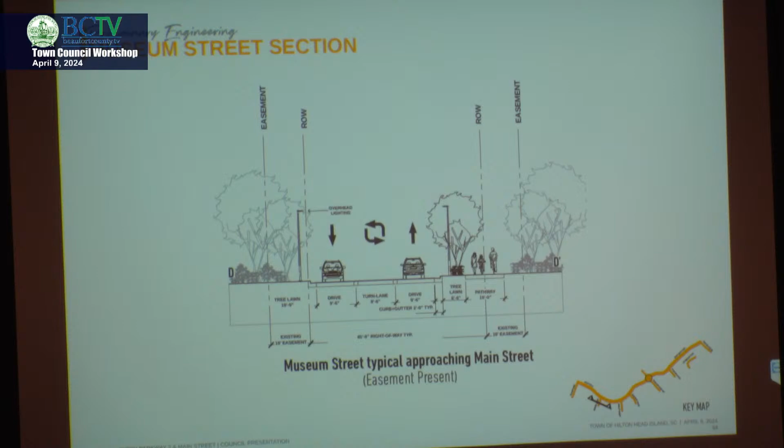We also looked at how we didn't make major changes to the roundabout there at Whooping Crane, but we did standardize some of the pavement markings through there and looked at the operations of how that would interface, then looking at some of those crossings and potentially controlling or lighting those as you're coming in.

Highlight the pedestrians that will be crossing, because both of these are somewhat removed, at least on Whooping Crane, from the central circle. So you may not see bicycles crossing at those locations. John, in your opinion, is the circle operating optimally at this point?

Yeah, from what we've seen and observed out there, there are some things that we would recommend, and we've talked about that. Signage is really important at this location. There's not a lot in pavement markings, so we've made recommendations for markings.

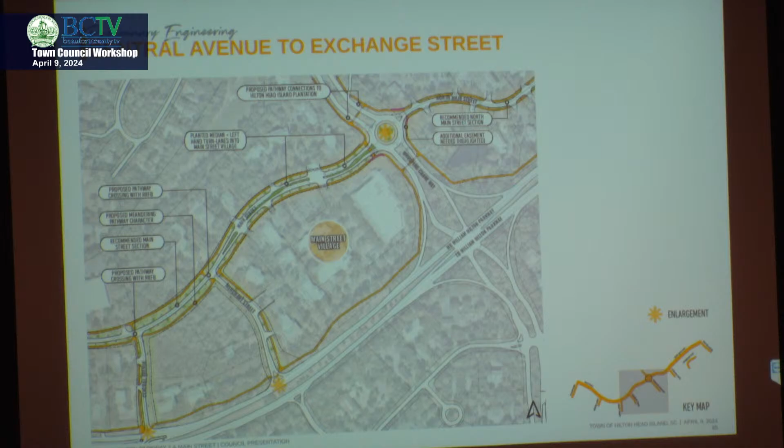I would say drive it every day. It is probably one of the safer ones that we have, because the speed limit's slower, and you do have people that are guessing which way they're going to go, but it's not at the speed that if somebody is going to jolt out or whatever, they're going to get hit. So it's interesting. Presumably, there's a conversation with Hilton Head Plantation that needs to take place.

Improvements. Absolutely, there are. That would increase the safety, but the volume is not at a point where you're by any means. Thank you. Question on, yes sir.

On Merchant Street, and may or may not have happened through y'all's visual studies - because when you're leaving from the plantation right onto Main Street, left onto Merchant Street, because of the way that Merchant Street intersects with William Hilton Parkway, as to if you're trying to go left or right onto William Hilton Parkway. And there have been times where folks have actually made a left hand onto William Hilton Parkway and going down the wrong way. So I'm just curious, is this going to address that as well?

Yes. Signage and wayfinding. We even heard of some of that occurring up at Whooping Crane as it intersects there as well. That right signage is important as part of it.

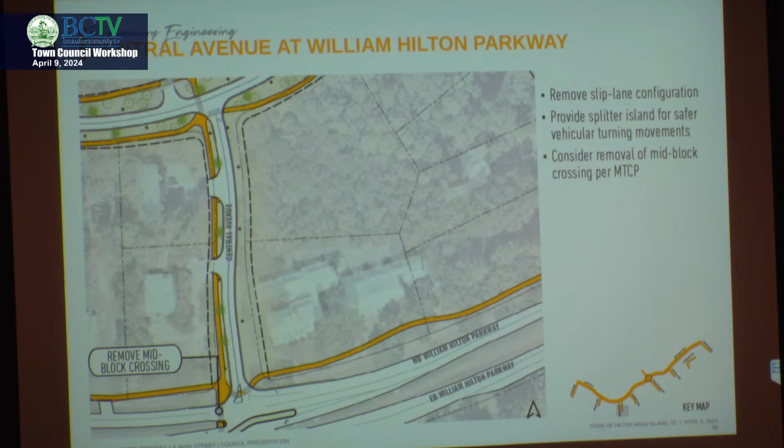And then looking at Central Avenue, this one, we don't have a center turn lane on that, but we do have again consistent travel lanes through there at 9.5 feet, tree lawn, and then of course we've got a pathway of 10 feet on the connector streets, and provides that local mobility, but given the volumes there, you don't need that out there. And then looking at how it comes into the intersection there with William Hilton Parkway, keeping the right turn lane there, but changing the geometry of how that interfaces with that.

Sweeping right turn lane is gone. We've narrowed the street down, smaller street, providing that trail with a nice generous separation as you come up here, and then focusing those pedestrian movements at key locations where they're still visible and not in the acceleration zone, much closer to William Hilton Parkway.

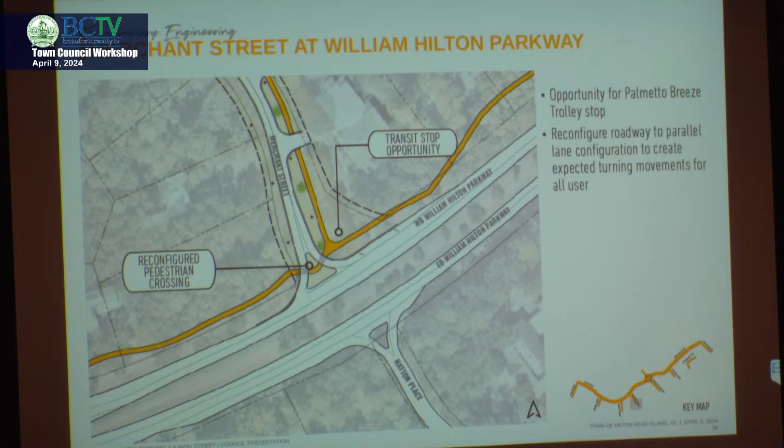Looking up here with Merchant Street, you can see the typical section for that: very similar 9.5 travel lanes, variable tree lawn on one side, and a 10-foot pathway from that standpoint.

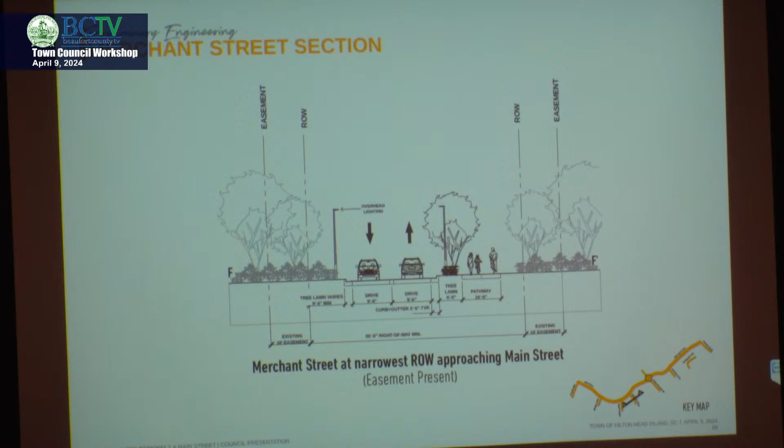As mentioned earlier, at Whooping Crane Circle you can see some of the operational improvements we've talked about, with lane markings and pavement markings standardizing that, plus typical signage straight from the MUTCD for what they'd recommend for a roundabout. No major structural changes other than where Main and North Main circle, where there are some channelizing islands. Overall the circle's operating well, and this just enhances it.

So one question: when you come out of HHP and make that right turn onto Main Street, you're showing that crossing very close to where someone's starting their acceleration, with an RRFB there. If I'm making that right-hand turn and someone has just triggered that signal, what do I do? I'm worried about seeing it when making the right-hand turn because I'm looking for traffic coming around from my left, so I may not see it.

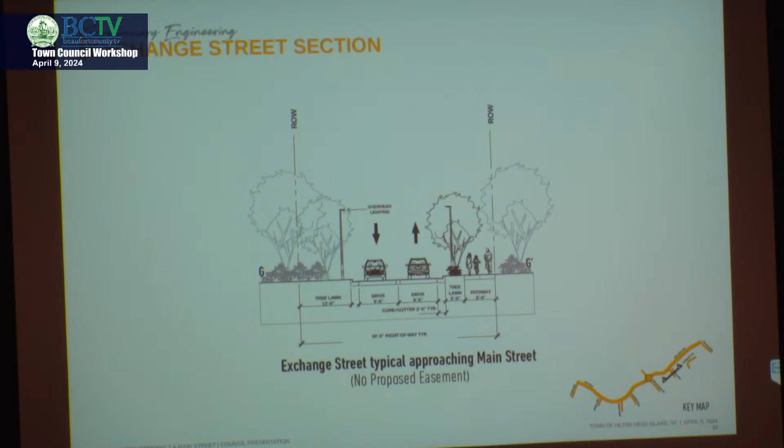We'll do our best. Typical section there, I've mentioned all of these. The one difference on this one is that the pathway is 8 feet through here, and we can look at shifting that slightly, maybe increasing to 9-foot travel lanes with a dedicated tree lawn area. Another interesting intersection.

It's all about the solar eclipse, it messed everything up. So it's not IT, it's the solar eclipse causing problems. Thought she caused the solar eclipse. Yep, getting close. All right, there we go, excellent.

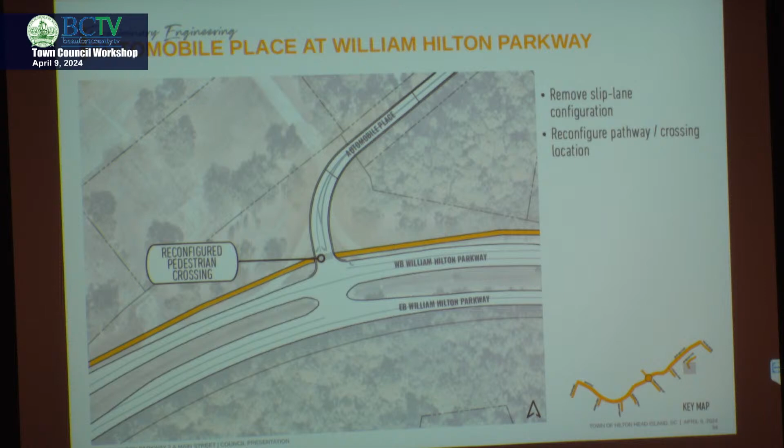So, an intersection that really doesn't get a lot of traffic today, Automobile Place, had a point at some point previously, but again, removing that slip lane, reconfiguring the pathway and crossing location, standardizing this. It's got one of those interesting T intersections with layered right movements done many years ago. Taking that out, standardizing it, reducing that crossing, setting this up for something in the future, access at that location.

And like you said, for the future, which was my question, because the town owns a property there and wants to accommodate whatever future uses there might be.

Absolutely. So looking at Main Street at Hospital Center Boulevard, this is an interesting intersection at this location. You have a heavy movement cutting onto North Main Street, and some very diminished sight lines at this location. One thing I'd recommend here, which can be done with just signs, is to establish an all-way stop at this location. Once you get comfortable driving that, you'll see how efficient those are. It takes away the guesswork for people turning from the side street, and you have a lot of people turning from the side street here.

So narrowing this down a little bit, it does open back up as you come around, but setting this up so it's a single lane approach on all sides, that pulsing of traffic with an all-way stop really makes a difference. You don't need a left turn lane but still accommodate that, then set this up to provide crossing locations for pedestrians and bicyclists on our shared paths, and clean the vegetation back so the sight lines are opened up. They've started doing some of that already, it'll make a big difference in operations.

You can see here a typical section of what that may look like, with 11-foot travel lanes and a generous median. Wish we had that in a lot of places, and of course that dedicated 10-foot pathway there on the side adjacent to North.

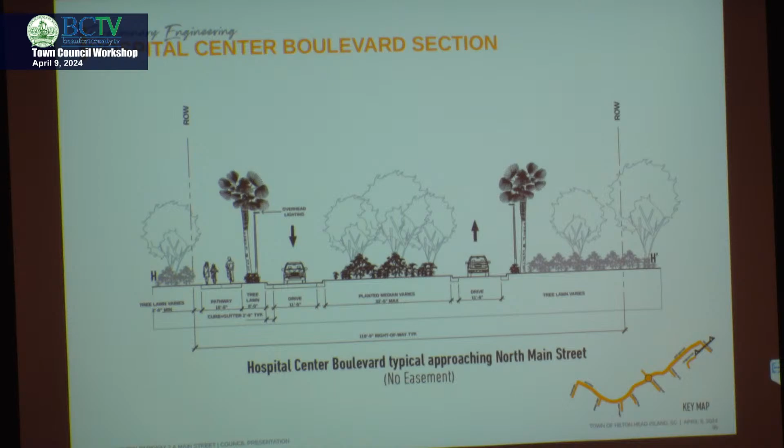So if I'm on North Main Street, it says remove right-hand turn from Main Street onto Hospital Center Boulevard. So you can't turn right to go over to Beach City? No, you can still do the right turn, there's a lane there today. Oh, so we've taken the lane. Okay, I read it as right. Yep, you can still turn right. Ah, good, okay.

Thank you, while you're still there. We've got property on Main Street that we're looking at, so there could be increased development movements here.

Not suggesting a roundabout here because of right of way. No, you have the right of way to do that. In this case, because of the polarity of the movements occurring there, the all-way stop actually performs just as good as a roundabout. It still allows us to do this, something we could do relatively quickly.

I'd also ask, from an ambulance standpoint, if they've got to make a turn, is it better to make a sharp turn or a slow curvy turn? Sure, good point. The radius is our setup, we did run AutoTURN. The all-way stop will actually help that from that standpoint as well.

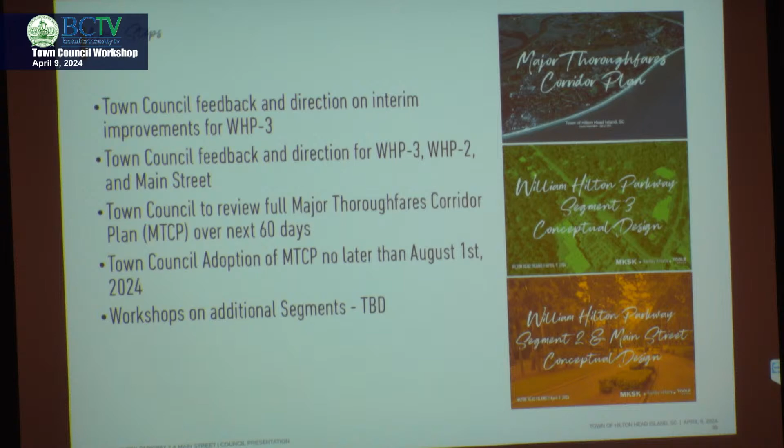So I know what we just saw, two hours of going through this, is a lot of information, but for the next steps, Brian, if you can advance to the next slide. We'd really like to hear your feedback and direction on the interim improvements that Jim talked about for segment 3, and we'd also like to hear your feedback and direction for segment 3 and segment 2 and Main Street. You have the full corridor plan in front of you that you can review over the next 60 to 90 days. I think we are anticipating this coming back to council for adoption in August. And then as we go through the other segments, we'd have additional workshops as needed, and as we receive your guidance for segment 3 and segment 2, we would reach out and get additional stakeholder feedback from Hilton Head Plantation, the school district, whoever we needed to for that.

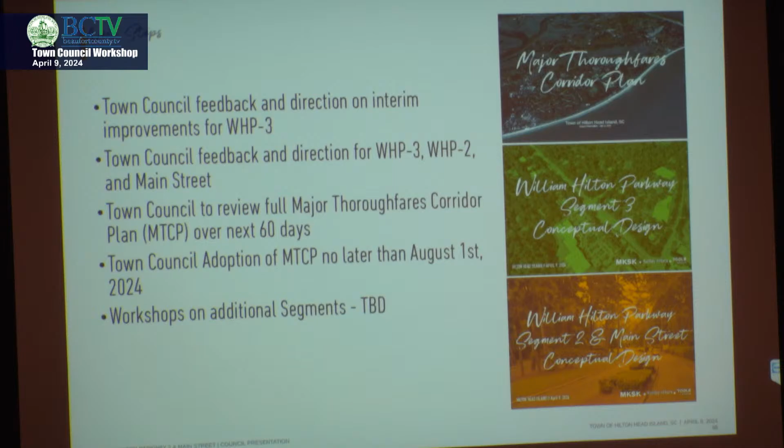So I know Sean's given me some questions to ask. I don't know if you just want to open it up for general comments, or I can ask these to guide those - it might be helpful. We have folks here to make comments, I think. Well, let's go ahead and do the appearance by citizens first. That way it may spur things, and it gives you time to take a break.